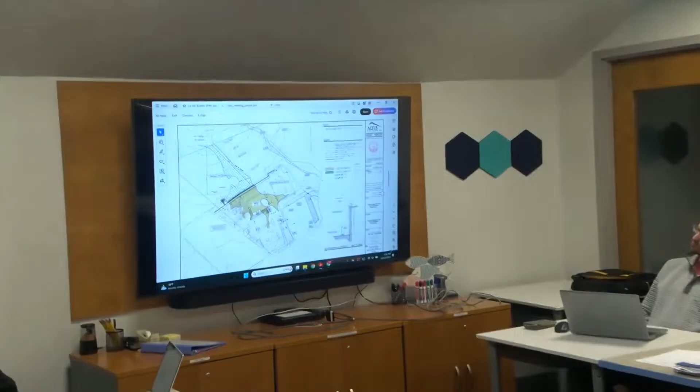Right there's good. You can see on those plans, the back side where you see the dark green, in the prior plan, that was where we had a big wide strip of fill that we were going to use to surcharge the internal part of the building. We were able to eliminate that, reducing it by almost 7,000 square feet of temporary impact.

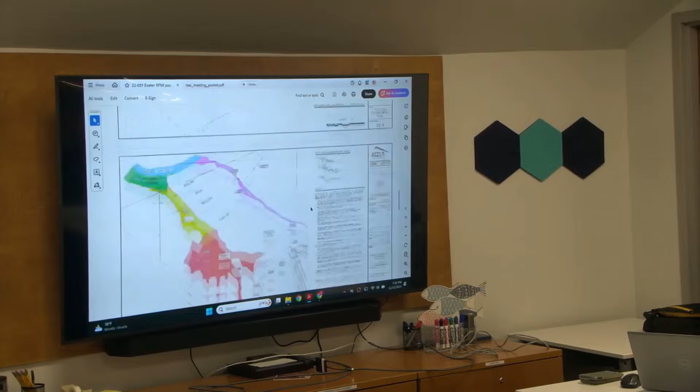Next one. One of the things that Kristen Duclos had requested was the prime wetland to be delineated onto the plan. It's really off the site, only the very tip comes into the site, and on this plan you'll see that's the green back over there, and that's based on the town of Exeter's prime wetland definition.

Next plan. Oh wait a minute, sorry, Kristen. We also show, and we focus this plan with the state setbacks for the state permitting. We do have tonight, Corey's brought with him a plan with the town setbacks because we want to start to plan our timeline to come forward with the town as far as that goes.

So you'll see on there all the normal tidal buffer, tidal HOTL, highest observable tide line, all the shoreland impacts, the 50, 150, and 250. Next one, please.

This was a temporary sediment and erosion control plan that will take place during construction and the surcharging. I know there was some concern about that, and so Corey put together a plan during the construction that shows some of the BMPs that will be in place during that construction.

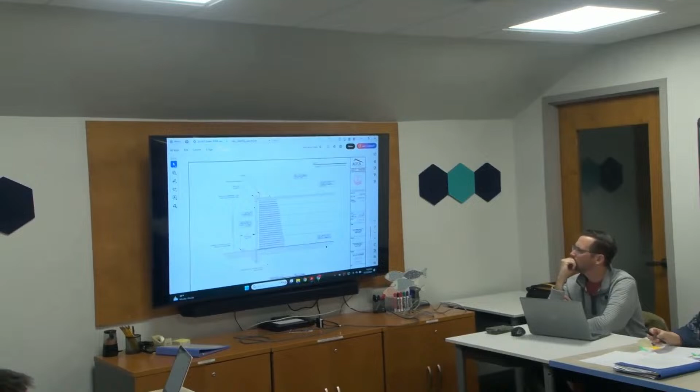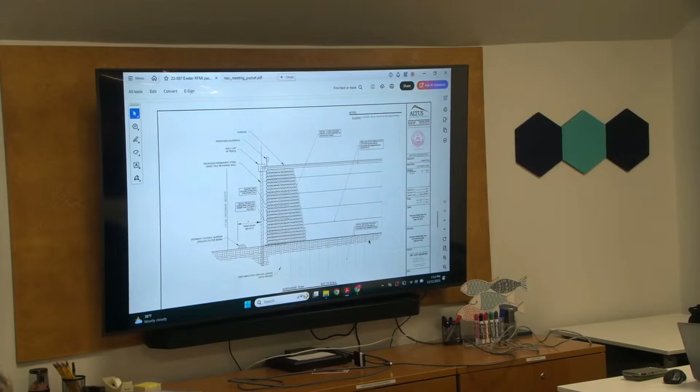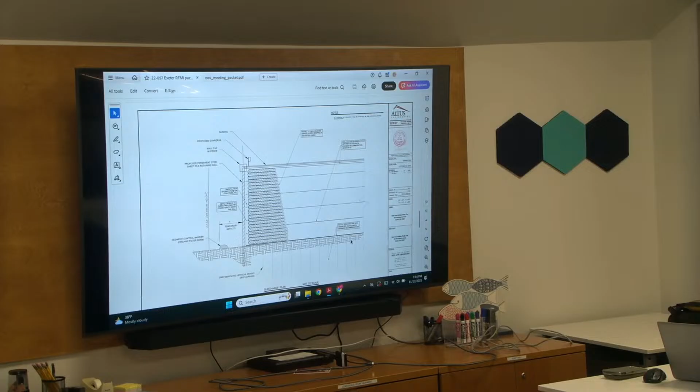Okay. So as mentioned, we weren't involved at the initial phase of the initial application. After we got on board, we worked with SW Cole, the geotechnical engineer, Miller Construction and Structural, and Severino Construction, who it's anticipated will be the contractor for the project. We all got our heads together and tried to look at different alternatives for constructing this site, minimizing the impacts, particularly that 1.5 to 1 slope on the back side that really extended back from the top of the wall - over 7,000 more feet of temporary impacts within the wetlands.

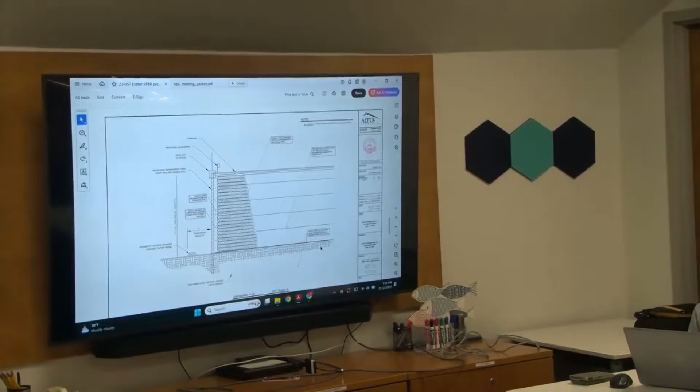So, talking to Severino and the geotech, and I don't want to overstep my bounds since I'm a civil engineer, not geotech or structural, but the intent would be to do like a drain mat with wick drains on the bottom, so they insert the wick drains. Then they would preload right in front of the wall. They'd basically do crushed gravel layers and wrap it with geotextile fabric, building that up layer by layer. Then as they build that up, behind it, they could start to preload the site on the backside. They'll monitor that for settlement.

The wick drains - the soil they're anticipating is going to compress, get the water out of it. It would come up through the wick drains, out the matting, and it's a very, very slow process. There was a discussion about how all that water comes out, but it's maybe an inch per month, I don't know exactly what it is. They'll monitor the settlement on the back side of the wall, build that up, and once they've established there's no more settlement, the preload is completed, then they can come back in and put down the sheet pile, driving the sheet pile wall right in front of that crushed stone layer they've built.

As they've built that, they've also extended out their tiebacks, so then they'll tie that wall right into the tiebacks. That wall's there, connected, stabilized, and it's ready to go. So anyway, that's the intent for construction - it really minimizes any impacts on the outside, with almost all of the temporary impacts on the wetland side of the wall. To me, it seemed like a pretty good concept.

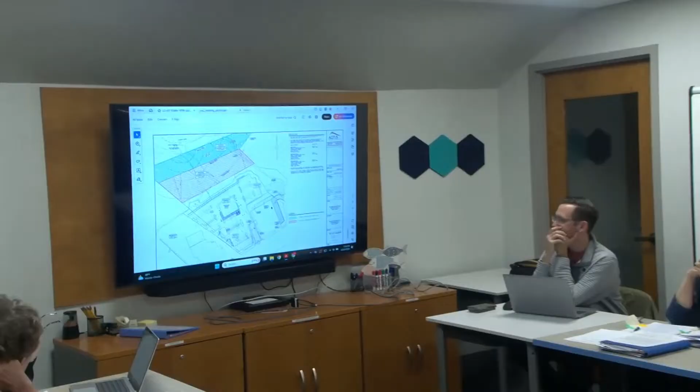So this is the plan where we took and added about 1.65 acres of additional land that Dan Enzing would submit for conservation land. We would need a conservation easement holder. We would have to do quite a few things still, but this was the concept based on input from you guys the last time we were here.

That's all, I just want to do all the questions at once. Okay, that's the last plan sheet right there, right? Okay, alright, so we can go back and do questions. Alright, let's open it up to the board, any questions?

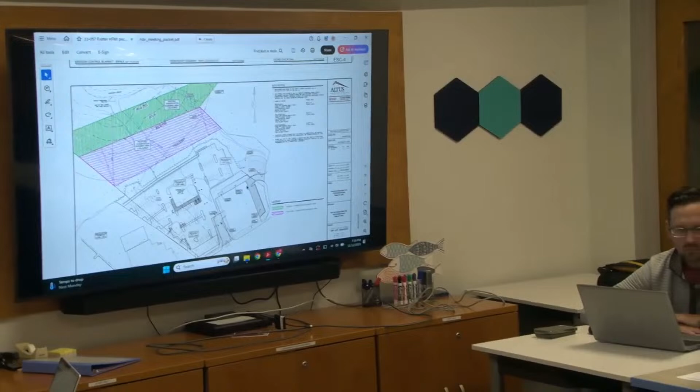I have a couple of questions. Sure. The project is pretty big, it's 28,000 square feet impact on wetlands, so I do have a concern about that. It looks like it's going to triple or quadruple that area there with the other dealer, the Volvo and the Kia. So that's one of my concerns.

I had a question about your parking calculations. So the Volvo dealer, I think their building was 18,000 square feet, and they wanted 72 parking spaces. And this Kia one, your building is 9,000 square feet with 161 parking spaces. So I'm just wondering about the calculation on that.

I can turn that over to Corey again. Alright, yeah, I mean, this is not a dealership really, we've gone through this before - the parking spaces, it's more of display, it's storage for their product, their vehicle storage stalls. So parking calcs aren't the same as with a retail building where you have employees. This building and this addition will probably have - I don't have the exact numbers from Dade Auto, but just guessing, maybe 20 employees and maybe 10 visitors at a time, maybe 30 parking spaces total would suffice for the employees and visitors in this building.

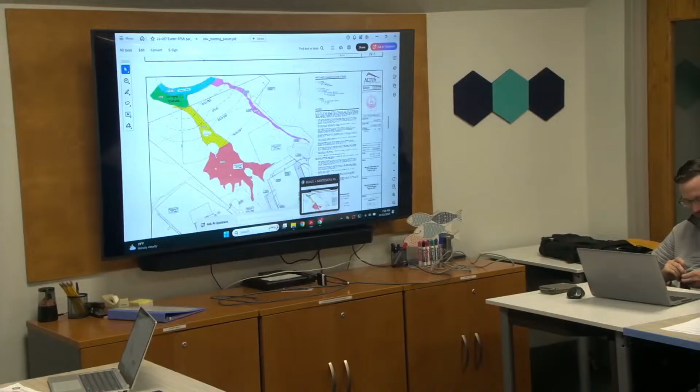This is 2024, right? Yeah, that's not changed, that's still part of wetland 1C. But it's not prime wetland. But it was marked that way in this one. No, this over here is not a prime wetland map. This is the functions and values wetland map where I labeled them 1C, 1B, and 1A. Two different maps.

But that is titled, sorry, I'll take advantage of a pointer, this section is titled marsh. No, it's the same color and label up over there, but remember, this was way off property. I didn't have permission to go out there and do anything, and it was totally away from the project. But this got all flagged, and then I flagged more to the edge right here.

That is from the wetland that was done prior, and I included it in wetland 1C. This is not representative of prime wetlands, this is my function and value assessment. Here is the prime wetland that we delineated, that Kristen Duclos had requested. I guess I just asked that, I know Kristen asked for a copy of it.

No, it's okay, you guys, I'll chime in later. Yeah, sure, if you want to use a pointer, the green button there. Oh okay, I don't know if it'll work on the screen. It's kind of, I don't... oh, barely, thank you though. Barely, if it was red, I think it would have been better.

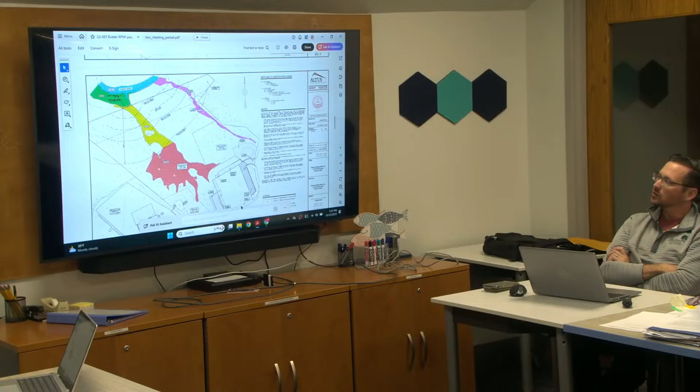And then, sorry, one more question. No, go ahead. Okay, in your New Hampshire Coastal Viewer, when you looked at the sea level rise conditions, what were your parameters for that? It's not in there, I had submitted it separately, trying to keep a separate PDF. Yeah, there it is.

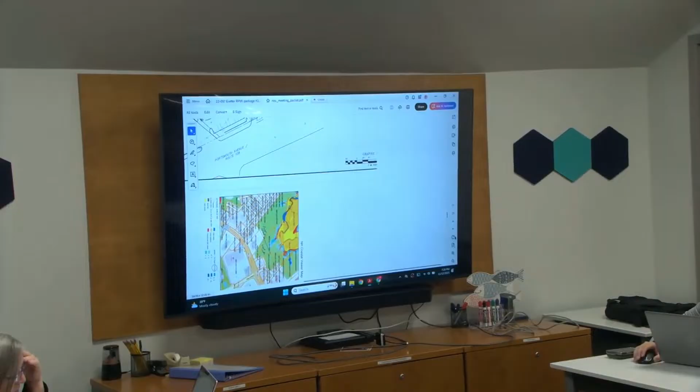We went into GIS and I believe one of your members had concerns about the 1 foot rise. Right, and we actually did the 1 foot and the 2 foot, and both of them do not impact the site. So we just go right on the DES website to go through it. And that's for the life of the project, 50 years.

Is there a snow removal plan? I haven't seen one. Did we do one for the parking lot? I think we talked about it initially. Certainly snow would not be dumped into overflow - that would be a condition not allowed for the site plan application. On the site plan application, we will address snow storage and snow removal areas for the site.

Connor, you got one? I think it comes at a weird time, given that we just saw the next door application come in, and a lot of their stormwater was going off to the north. I was wondering what your plan was - I don't know what sheet I'm on, page 11, but it looks like there are parking spots built over the basin they were talking about a month ago. I didn't know if there was an update on what the plan is there.

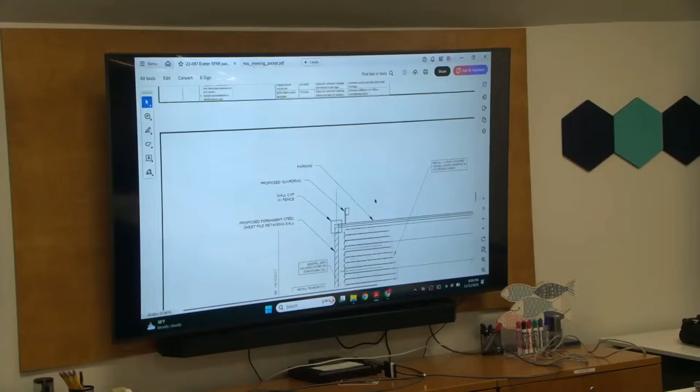If so, then the only thing between that grubbed area is the sediment control or organic filter berm.

So I just don't understand it from this. What's happening when? It doesn't feel like a phase plan. It looks like it's already built out, and this is showing where the surcharging is happening. Is that right? Am I reading it wrong?

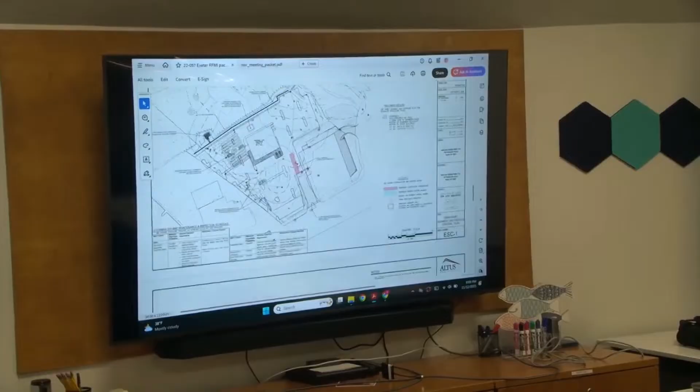Correct. So the questions swirling for me are like, what is happening in this area in terms of soil exposure and all of that, just for when you come back for local permits? It's very confusing to me.

Right, certainly. They would clear and grub the site. They would grub the area. I would defer to the geotech on what the limits of that drain mat would go under.

It's going to be based on the limits of the compressible soils in the geotech report. But it's predominantly down in that lower end, the northern portion of the site, my understanding. That's where you have the higher clay soils that really need the wick drains to get that settlement.

They come in, they build that, start building the basic crushed gravel wall, just in front of where that retaining wall is. The site's cleared, they'd have the mat, then they start loading, doing their preloads. And as they preload, they're monitoring settlement.